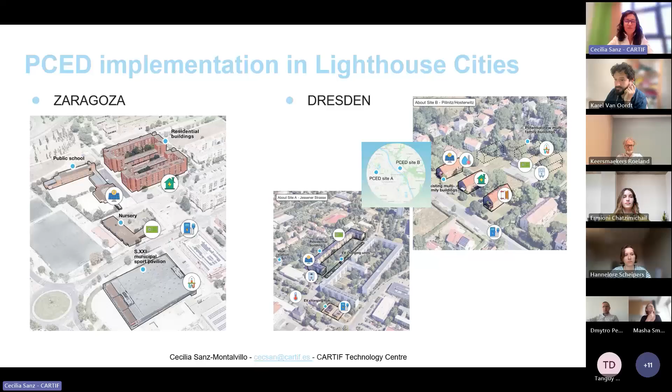We work with private buildings, residential and tertiary ones, and also public buildings, and we work on the energy grids that we have in our cities. From these different solutions we implement in our lighthouse cities, our fellow cities adapt some part of the solution, or learn about what we have done in the different cities.

So we have 5 cities working on these objectives, and today we are going to focus on the activities of Ghent, one of our most advanced fellow cities, and we'll explain what has been done during the project in these aspects.

So thank you for these questions, and now let me tell you more about Ghent solutions and how they are facing these activities in Neutralpath.

Thank you so much, Cecilia, for showing us and reminding us the relevance of the Positive Clean Energy Districts for climate neutrality, and showing us examples of collaboration with cities. We're seeing lots of colleagues joining from other projects and initiatives, and we're really happy to share these insights from the City of Ghent.

So to focus a little bit on the how, we will introduce our colleagues from the City of Ghent. But first, they have prepared, and we will facilitate a little bit of questions for you, to know a bit about the scale or reach of the knowledge within this audience right now.

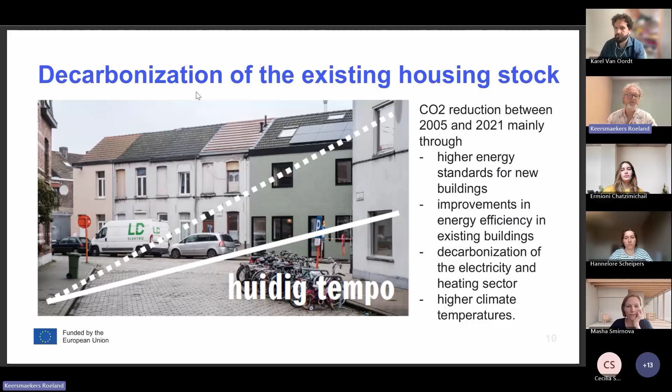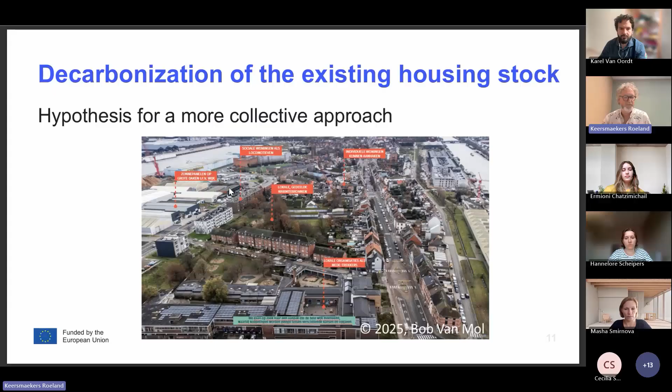It's not because the renovation ratio is so high - it still remains around 1% of renovations every year. So that's why with our Living Lab we make another hypothesis, and we try to test an even more collective approach on the scale of a district as a better way to approach the energy transition.

The Living Lab Muide fossil fuel free. We want to test whether the energy transition can be accelerated at the district level through the introduction of decentralized collective solutions. The existing known systems to make the built environment fossil-free - individual heat pumps on one hand and urban heat networks on the other - each have their limitations. They are not always efficient or inclusive, or are very expensive and complex to implement. Decentralized sustainable energy and heating system solutions allow energy efficiency, production, and flexibility to be addressed simultaneously.

Consider, for instance, a local field with geothermal drillings below that is used to heat several dozens of homes around this field. The renovation of these homes must then be considered at the same time as the implementation of the energy system and the availability of heat or electricity during the day or the year. Such collective systems allow the inclusivity issue to be included from the start, and these systems are more affordable in the long term.

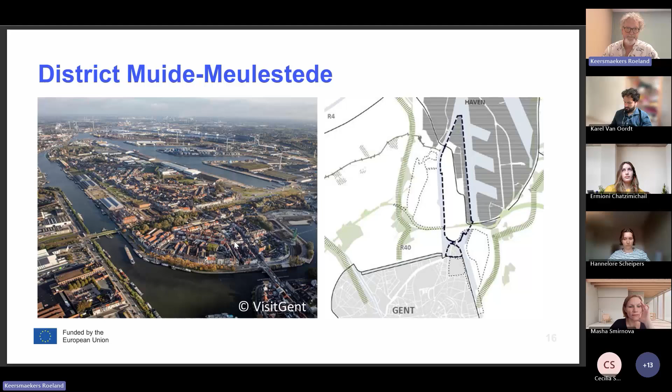We give now a short introduction and an impression of this district. In the photo you see that it is surrounded by a lot of water. It's also very close to the harbor - in the north you see the harbor of Ghent, and the city of Ghent. So it is a link between the city and the harbor. With this collection of pictures, you get an impression of the district: it is densely populated, a dense neighborhood with many apartment blocks and small houses with very limited private outdoor space.

It feels spacious because a lot of water is around this district. It's kind of a peninsula, but there are a few shops and facilities for local residents. It has also a very young and diverse population with high unemployment rates. That's kind of a reason why we chose this district for the living lab, because there are a lot of challenges, also a lot of vulnerable people. We think if we can manage to implement this kind of project here, there are a lot of possibilities to upscale it to other districts of our city.

Another reason to choose Muide-Meulestede is that there is already a strong social involvement of residents. Already in 2016, there were a lot of new developments taking place in this district. The city was making plans for a real redevelopment of part of the district, and residents asked to be involved in this process. So this was the starting point of a city renewal program called Muide-Meulestede Tomorrow, and from the beginning, residents were involved in this process.

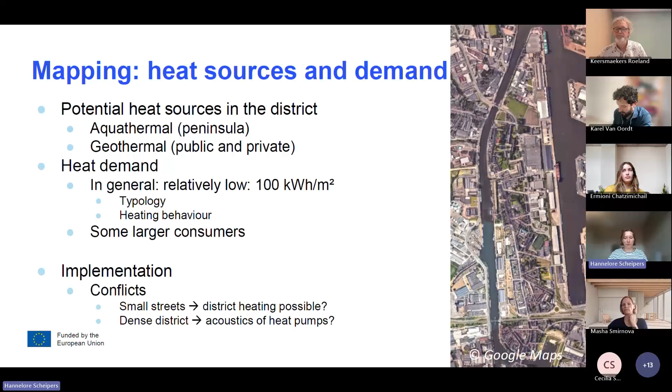Going from the full district level, we decided to determine project clusters. Heat is in the Lead was one of the codes used, because the project clusters are defined based on heat demand and heat source potential. So per cluster, we searched for a balance between those two.

We aimed for smaller clusters that can be semi-autonomous projects, small enough to be feasible to implement, not too large scale to be impossible to work on, but big enough to have impact. Still large enough to work as pilot projects that people can see what's possible, and big enough to have efficient collective systems.

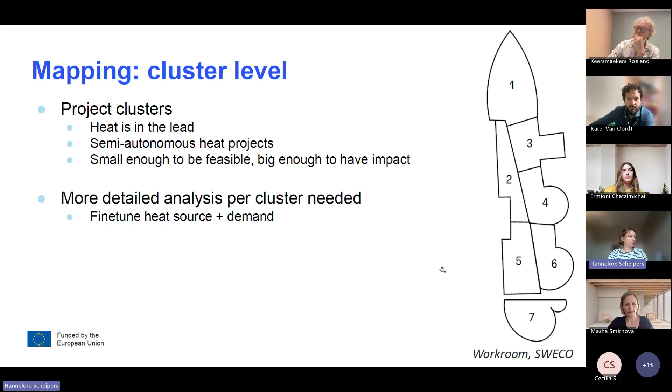More detailed analysis is needed in these clusters, because the district scale analysis was quite broad. But when you fine-tune it, you come to these kinds of maps. This was one of the outcomes of the study.

Per cluster, we investigated the preparedness for low temperature heating. The light blue buildings are prepared for low temperature heating, while the dark blue buildings don't have a sufficient insulation rate yet. Then locomotives and large consumers are indicated on the map.

These can serve as an incentive for a district heating system to make the business model more feasible, by having a large off-taker at once that is in hand. Some of them are in hands of the city, so we have something to say about it.

Then the potential of geothermal energy was investigated, to see how far the bore fields could deliver heat for the dwellings.

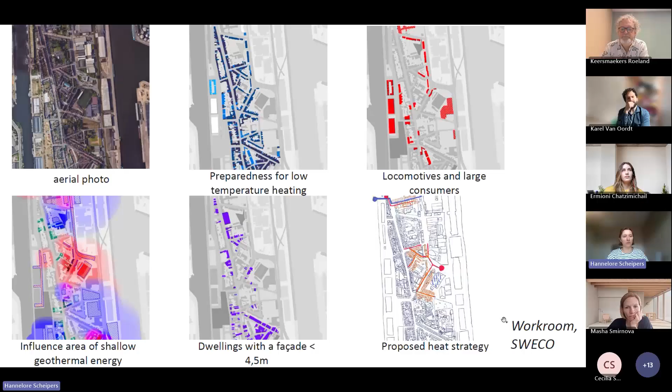Then the width of the facades is a parameter used to investigate potential noise problems due to heat pumps. When putting all these maps and information together, we came to definitions of proposed heat strategies per cluster.

Then to go on to a case study level: on the map you can see the case study we are working on. It consists of a football pitch where we propose to put geothermal boreholes under it to serve as a heating source, connected via a district heating grid to serve the dwellings around the football pitch.

It would be feasible to serve approximately 230 dwellings with the heat extracted from the geothermal boreholes. This collective solution will also be compared to individual heat pumps without district heating, so we had to analyze the current situation of this case study and its dwellings.

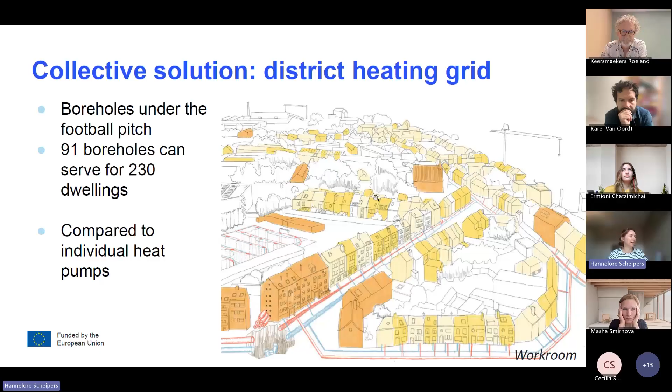At first we had to investigate a typology of the dwellings.

These are the floor plans of the typology we defined. At the ground floor there's an entrance hallway, the living room, and the kitchen. On the second floor, a hallway with the bathroom and two bedrooms. On the third floor, under the pitched roof, there are two extra rooms that can serve as bedrooms, offices, or attic, depending on the household's preferences.

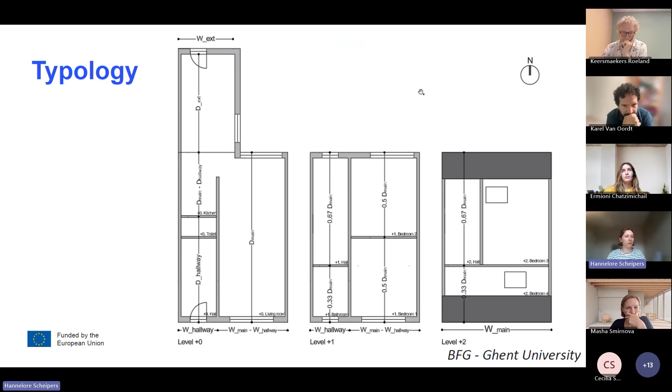Then the insulation rate was also investigated. We did house visits in dwellings surrounding the football pitch and estimated the EPC levels. It's not a fully accurate detailed EPC assessment, more of an estimation.

In general, we see a low insulation rate. Most dwellings have insulated their pitched roofs, but the facades are barely ever insulated. The windows are mostly double glazing, but not up to EPB standards.

So it's not that good yet, but on the other hand, almost no insulation measures means there are also no lock-ins -- like if you do the wrong insulation measures, it's sometimes hard to insulate the rest of the building. That's not present there yet, so there is a large renovation potential, since everything can be done up to EPB standards at once.

Concerning the heating systems, as I already mentioned, almost all dwellings have individual gas boilers. Not a lot of individual heat pumps are installed yet, which also means people can connect to the district heating without having already invested in their own heat pumps.

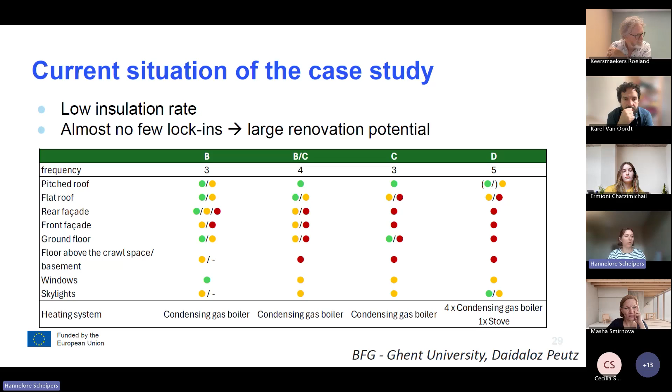So then I'll go into the fossil-free solutions that we propose for the district. First comparing individual and collective solutions, and then go into the heating behavior of people for a bit.

At first, the trade-off between individual and collective solutions has to be made. We had big discussions on it in the Living Lab, and in the broader context, knowing that it's an existing district with a lot of individual homeowners, no district heating solution is yet implemented. Then for the social part, I think Roland will go into depth more on that, but for the technical parts, these are the most important parameters to trade off when choosing between the systems.

So at first you have the energy use or efficiency, which can differ. When you have large collective systems, the efficiency can be higher mostly. Costs will also be covered by Roland - if everyone has to invest in their own heat pump installation, or you have a bigger installation, but then also the pipes of the district heating, that's a trade-off that should be made. Same for the environmental impact.

For integration as well, it's also a trade-off, because individual solutions take more place than a gas boiler. You have to put it somewhere in the dwelling, which is not always evident. But if you go to collective solutions, you have to have some place or dwelling that can be used to put the entire collective solution, because it's quite big. And then also for the acoustics - if everyone goes individual, you have a lot of individual heat pumps making noise. If you have one big collective installation, you have one big heat pump making even more noise, but then it's concentrated and it's easier to do something about it.

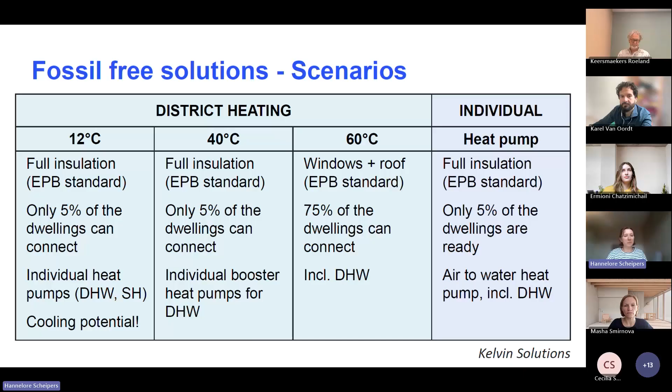So those are the collective solutions we propose. Roland will go more into the business model, the business proposal, later.

One extra slide I have is about the impact of occupant behavior, because it was also an important part in our research. It was a big uncertainty, because as I said, the inhabitants in the district now don't heat a lot. Their heating demand is quite low because of their behavior, their heating behavior mostly.

This graph is a bit of a nuance on it, because as you see, the graph depicts the net heat demand per dwelling in kilowatt hours, which is on the y-axis. And then for 3 insulation levels - uninsulated first, then renovating roofs and windows, and then doing a full renovation - the potential heat demands are depicted in the bars, going from dark red, which is when you heat your house 24 hours a day at 21 degrees in the entire house, to light orange, which is when you only heat 5 hours a day in the living room only at 21 degrees.

And then you see that there is actually a big decrease in heating demand per insulation scenario. As you see, for when you only renovate roofs and windows, there's up to an increase of 67% of heat demand, depending on your comfort preference level, which is a big difference.

And for a potential business case, if you have to calculate it, it's a big uncertainty because you never know how people will behave. Because also, like the uninsulated part, if you really don't heat a lot and you compare it to renovating roofs and windows where you do heat a lot, then you even consume more when you're insulated better.

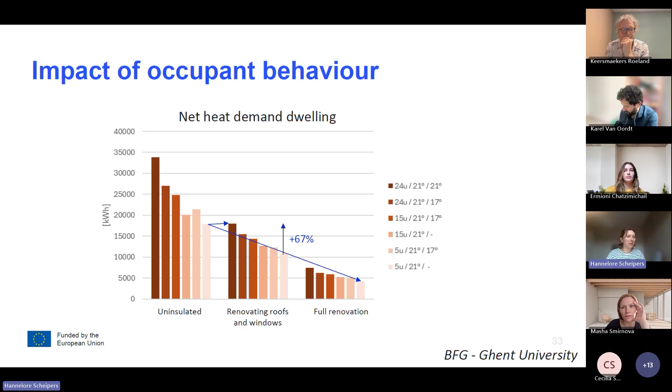So that's something to take into account, because mostly when people insulate more, they go to higher comfort preference levels, and their decrease in heating demand isn't as big as you would expect, which has an influence on the potential business case. So that's something I also wanted to pass through, something to think about.

And that would be the end of my presentation. And then I give the word back to Roland to go into governance and everything that he has to say. So, Roland.

Okay, thank you for this insight, this view on the technical insights. Now I will focus more on some strategic insight, but also the financial side of this proposal.

Because of course we don't want only a district heating network that is technically very feasible, but we also want a district heating network that can be realized, with inhabitants that want to connect to this and can afford to connect to this network. So cost will be a main factor. We have to think about how to develop a heating strategy, and in this strategy, cost is a key factor.

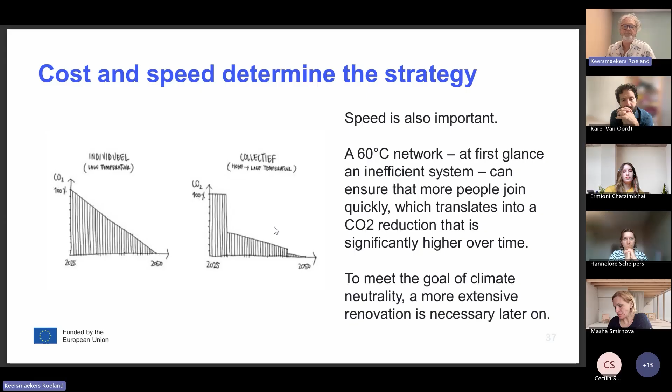And then, when the collective system and heat pumps have to be replaced, we take the last step and switch the collective system from 60 degrees to 40 degrees. So in reality, in practice, this heating strategy will follow a transition path.

To ensure that everyone has the opportunity to connect, it is important that the renovation offer is made first, with measures aiming at achieving level C. So it's like Hannelore said, the level where you renovate only the roof and the windows. After that, as many homes as possible will be connected to the district heating network as quickly as possible.

And we can organize that in, for instance, 3 different connection waves in 2027, 2030, and then 2035. During this first 20-year operational phase, the network will supply heat at 60 degrees. This gives residents the opportunity to gradually, at their own pace, continue renovating up to label A, a higher energy efficiency. And when the collective installation is ready for replacement, after 20 years functioning, the system can be scaled back to a temperature regime of 40 degrees.

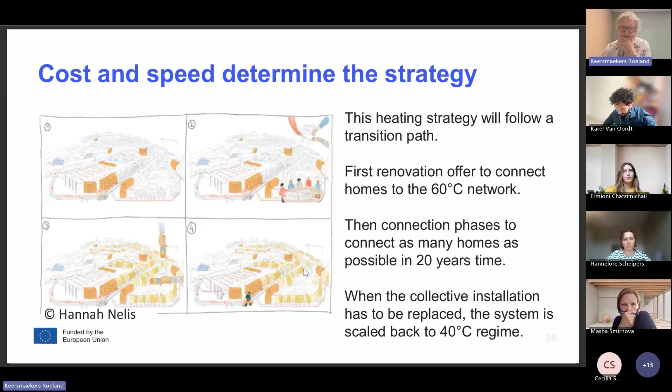So that's the heating strategy we have developed, not only from a technical point of view, but also from a financial point of view. Now we had to develop a business case. And the first difficult point we have to address is to determine an acceptable or a fair heating cost price.

Currently, in Belgium and in Flanders, there is no policy framework in place for determining acceptable heating costs, like is the case, for instance, in the Netherlands. Therefore, a methodology was developed by Kelvin Solutions for this pilot project to determine which heat price can be considered fair, based on various reference frameworks.